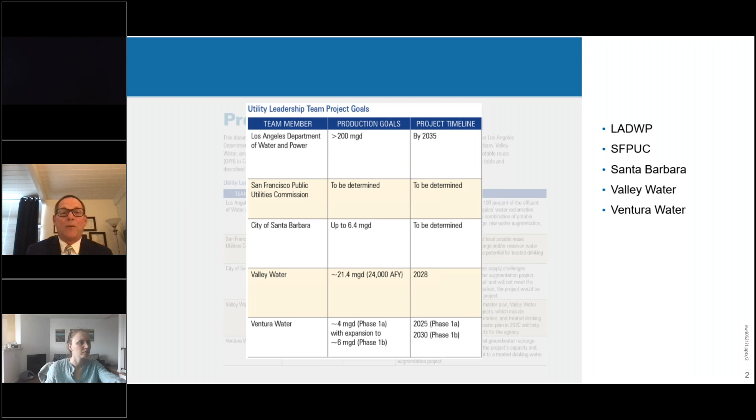So these 5 partners, and Mary, why don't you just go ahead and advance each of those slides. The 5 partners included the Los Angeles Department of Water and Power, the San Francisco Public Utilities Commission, the City of Santa Barbara, the Valley Water District, and Ventura Water. I want to take this moment now to acknowledge their support, this project wouldn't have been possible without their participation and financial support.

So who is our project team? Can you just advance it one more? Good. Oh, I'm sorry, back.

I'm sorry, Matt. Our project team consisted of myself, Suzanne Sharkey, the 4 authors who were Andy Salveson, Adam Olivieri, Charles Bott, and Dan Gerrity, and our utility leadership team made up of representatives from the 5 utilities. Today, we have to speak on their case studies Gina Dorrington from Ventura Water, Manisha Kothari from the San Francisco Public Utilities Commission, Hossein Ashktorab from Valley Water, and Jesus Gonzalez from LADWP. Next slide.

Using this guide. This guide, as I mentioned earlier, is to support elected officials and appointed officials, utility leadership consultants, regulators, and anybody who's really interested in DPR in California.

The guide was intended to provide support to them, yes, on a technical level, but on a policy level as well. The idea was to be used from the early stages of a project's development along the way through permitting and then through implementation and startup of a potable water reuse facility.

The idea was to have this integrated, comprehensive guidance that was more accessible for people who weren't necessarily as well versed in some of the subjects as the technical folks in this area. Next slide.

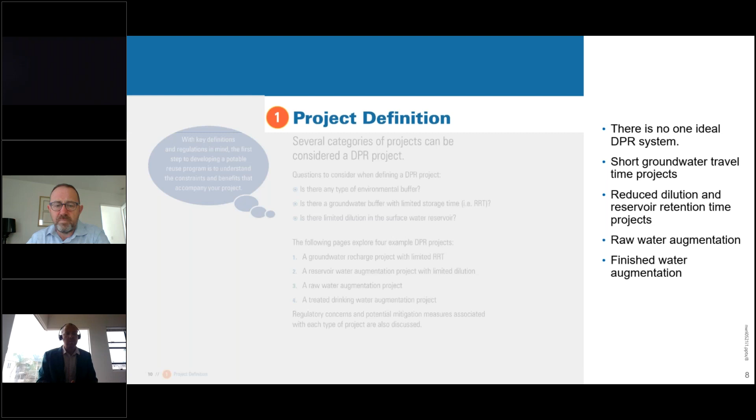And what these projects look like aren't based upon trying to hit any one of those four goals or types of projects. They're based upon the needs of the project themselves, whether a utility has a groundwater basin, albeit small, or a reservoir small, or how is it best to add the purified water into the potable system. So there won't just be four different options in direct potable reuse in California, there'll be much more than that. The graphics in this document try to illustrate some of these.

In this example, we have the community extracting their groundwater, using it, and then reclaiming it and putting it back in the groundwater basin. But the travel time is too fast compared to California regulations. It's less than 2 months. So that's a type of direct potable reuse.

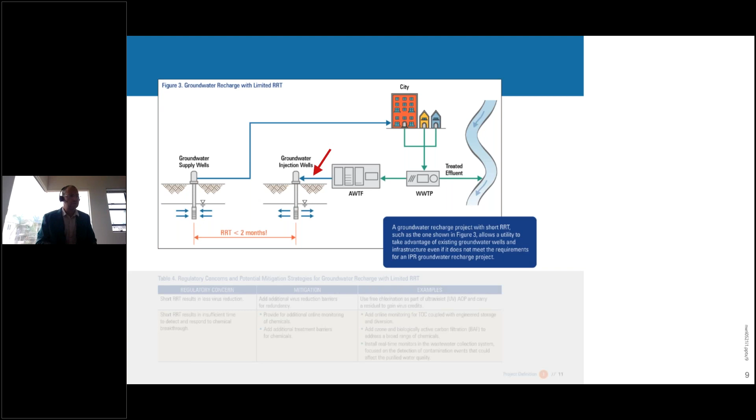Or you may have a reservoir in your community, but it is small. The time in that reservoir or the dilution in that reservoir doesn't meet the indirect potable reuse standards in the state of California. So again, it's just a different type of DPR.

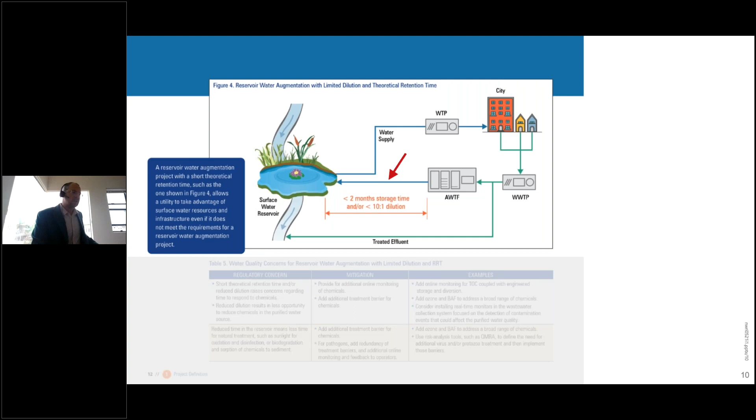And then we have this example where the purified water is sent into the raw water line to a water treatment plant. Through that, you've got blending of the water qualities and how that impacts your water treatment plant. What kind of credits do you get through the system? It gets a little more complex.

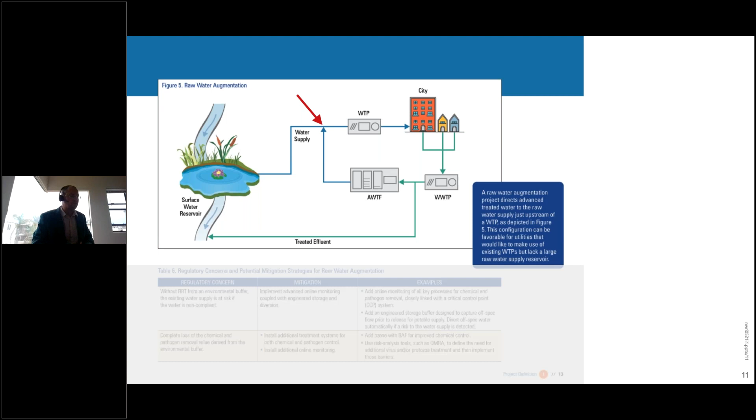And then we have the finished water augmentation or treated drinking water augmentation, where the water is sent downstream of the water treatment plant, blends in with the other finished water supplies, and goes to the community.

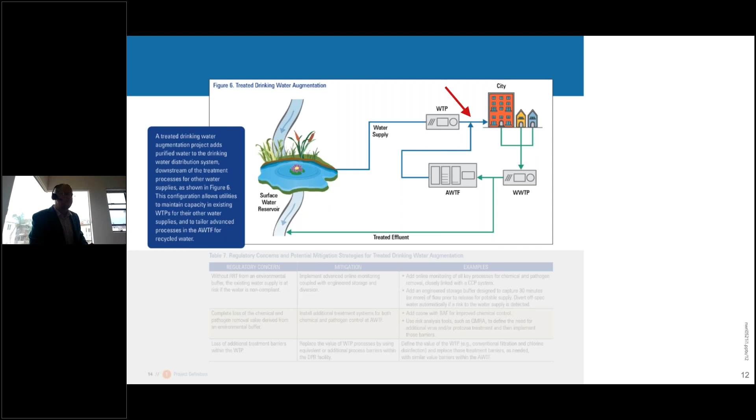So chapter 2 is on technical, managerial, and financial capacity and capability. These projects are challenging and costly. They are absolutely a monumental engineering effort, and those that have succeeded in them should be commended. It requires substantial capabilities as it applies to T, M, and F.

Plus, regulators are looking for not only the aspects of TMF, but a broader potable reuse mindset, where a utility is able to demonstrate its commitment and ability to maintain safe, purified water production for a long period of time.

Within this document, we break down the TMF into technical capabilities, looking at treatment systems, monitoring systems, operator training programs, O&M plans, and the long-term compliance records of the agencies moving forward, whether that's one agency handling both water and wastewater or multiple agencies handling different aspects of water treatment. Financial capabilities are clearly important, not just the ability to build the facility but to maintain it over the long run. Then managerial capability, all about ownership, management, water rights, etc.

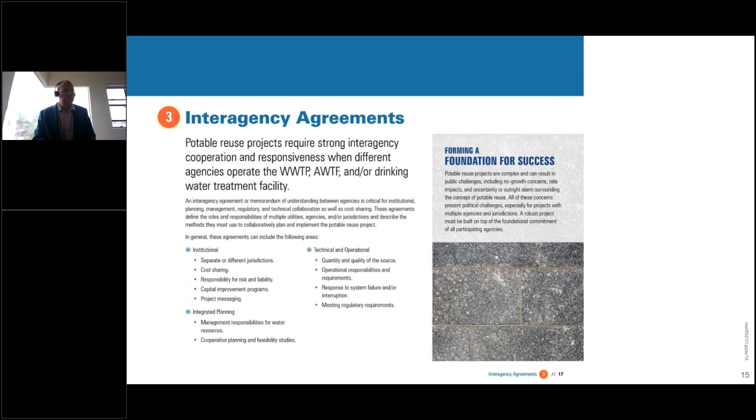Institutional agreements, integrated planning efforts, water quality requirements, and operations. There's a great example out there that everyone points to, and there were reasons why it was so successful -- this is documented -- between the Orange County Water District and the Orange County Sanitation District.

The different things that need to be evaluated in these interagency agreements start with source control -- a primary example of one of many critical issues -- but there's also water rights, the cost of water, and quality. A wastewater treatment plant needs to supply a certain quality of water for the downstream advanced treatment.

How are the projects funded? How are the regulatory questions addressed by multiple agencies? There are grant proposals for project funding, and never to be forgotten, or put last, is the cooperation on public outreach and engagement, where the same goals and messaging about water safety need to apply to all phases of treatment, whether at the wastewater plant, the water plant, or in the distribution system.

Going to that outreach and education, chapter 4 highlights some of the success stories and challenges of outreach and education, as well as helping map how to implement engagement programs.

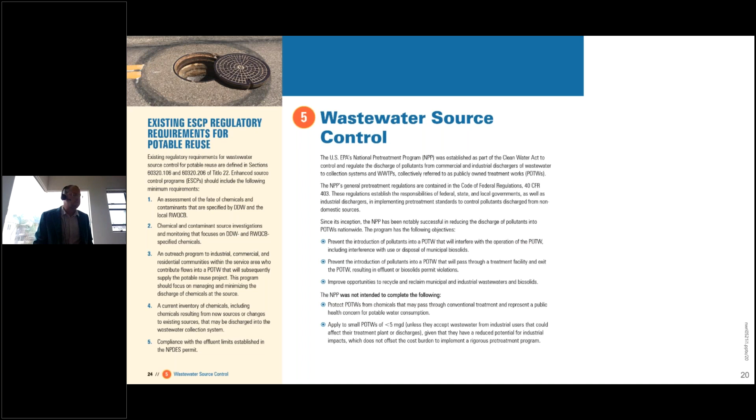Enhanced source control programs are the norm. Those take the national pretreatment program, or the local limits work done by large wastewater plants over 5 MGD, and expand them into this enhanced source control program. Through that, you take a harder look at the chemicals in your collection system discharged by industry, with greater outreach programs, greater sampling programs, and in general a much larger effort.

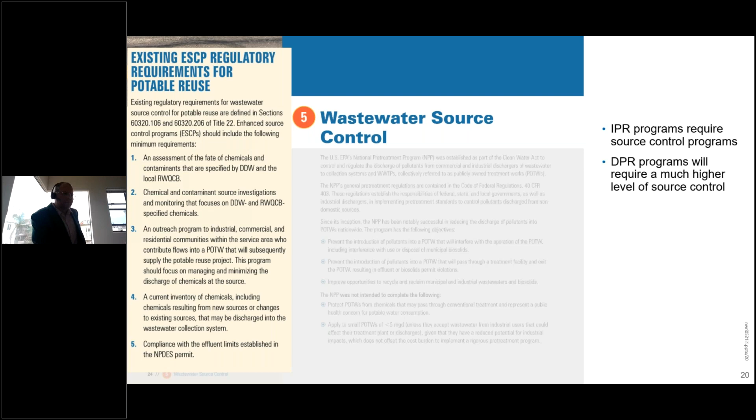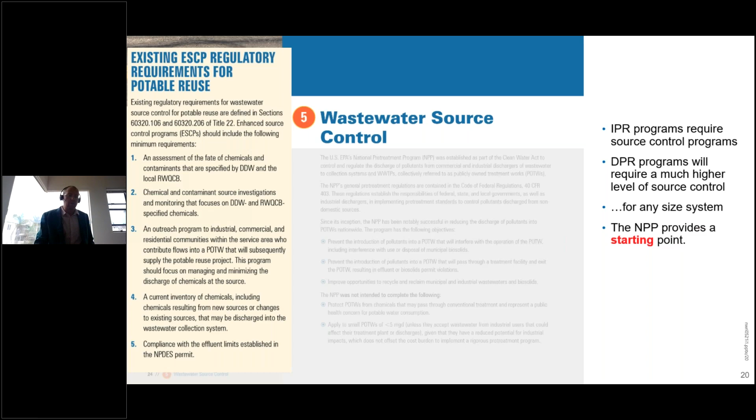But DPR programs will require a much higher level of source control, for any size system, big or small. We have to recognize as a group that the National Pretreatment Program really is just a starting point for these kinds of efforts, and there's a lot to come after that.

One more animation, please. So a primary question is, who comes first, business or water? And the answer is, well, of course, there's a water-first mentality, but business can't be sidelined. It's an important part of our community, and it's really unavoidable in our sewer sheds. So an effective source control program should strive to avoid negatively affecting industries while aggressively engaging them to fully understand the waste streams they discharge and how those streams can be best handled while reliably producing purified recycled water.

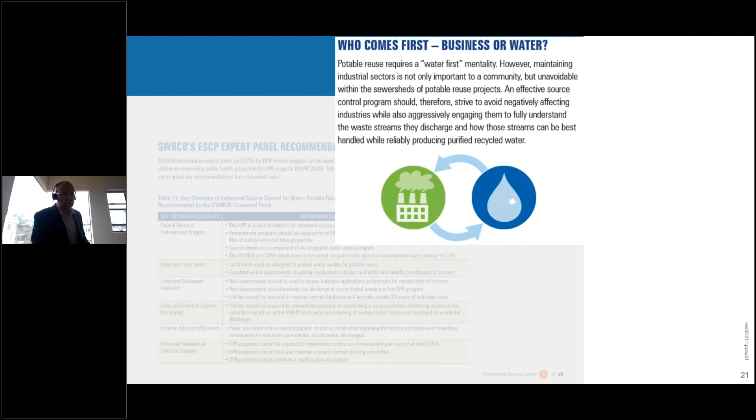Next. One more. So within this document, we do talk about the conventional enhanced source control programs where extensive sampling is done within the wastewater plant, the pure water facility, and into the collection system. And a number of the facilities that do potable reuse, I've seen firsthand them be able to track pollutants from the wastewater plant back to the source in under a day. So there's really good programs out there.

We're now saying what comes next after that. Animation, please. Go ahead, Mary. There we go.

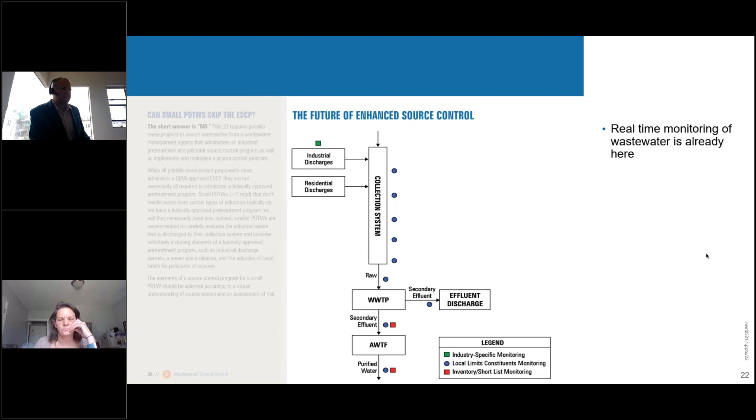So a couple more. Real-time monitoring is already here. And the latest work is examining how to best implement real-time monitoring within the collection system so that we can reduce some of the sampling burden and even more quickly find the source of industrial discharge problems that are posing a potential problem for potable reuse. And with that, I'm going to hand it over to Dan Gerrity.

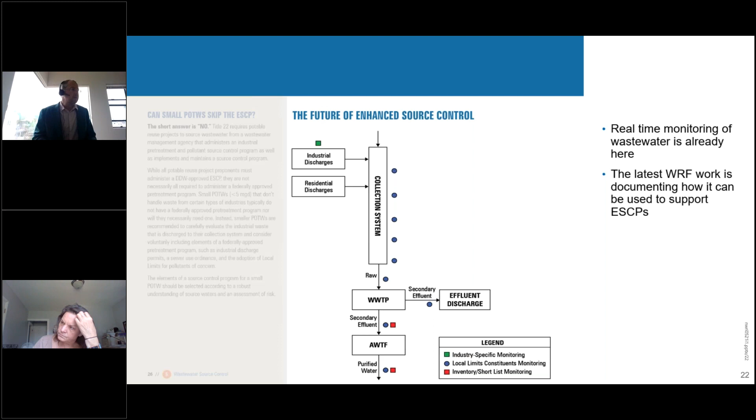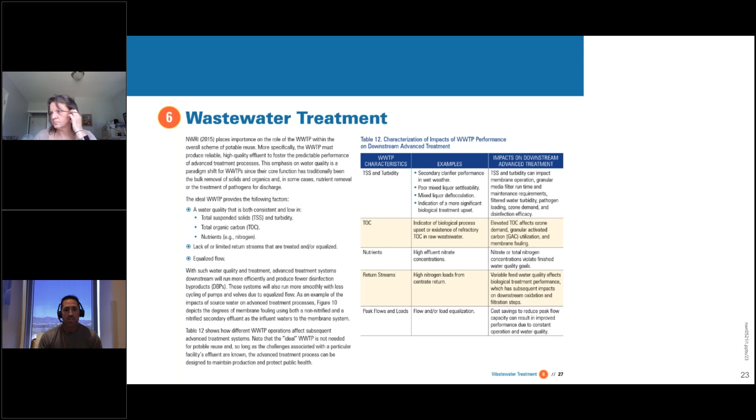All right, thank you, Andy. So one part of potable reuse that's often overlooked is the front end of wastewater treatment. And wastewater treatment in general is important because it sets the foundation for what's happening later on. So next animation, please.

The part that I wanted to focus on is the importance of setting that foundation. So a consistent water quality in terms of a few examples here, total suspended solids and turbidity, total organic carbon and nutrients, that's going to make that advanced treatment train work a lot better. So some particular examples, if you have variable total organic carbon, for example, and you have an ozone process, that's going to create a dosing problem because variable total organic carbon is going to cause that ozone dose to vary over time.

Another example with nutrients would be nitrite. And so if there's variable nitrification or incomplete nitrification, then that's going to impact the level of ozone dosing that's needed in that type of system.

Another example that relates to what I've done in the past in terms of research is looking at the importance of biological treatment on trace organics. And so often full nitrification is important for getting reductions in a wide variety of trace organics, which reduces the load on the advanced treatment train later on.

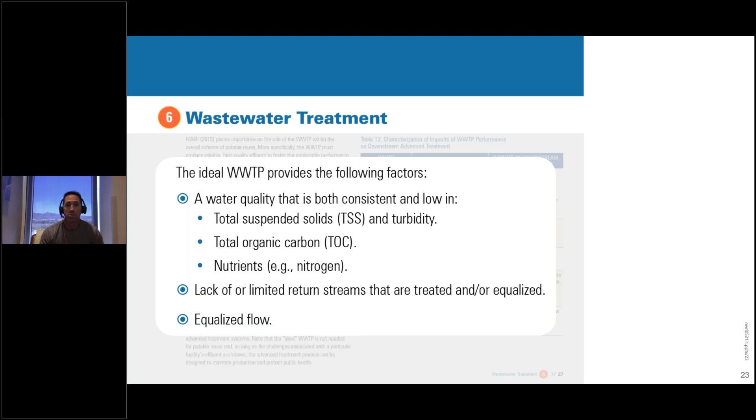Another issue has been return streams. And so return streams have been identified as a potential source of NDMA precursors, for example. So by limiting those return streams, it's going to possibly solve problems that might pop up later on. Next slide, please.

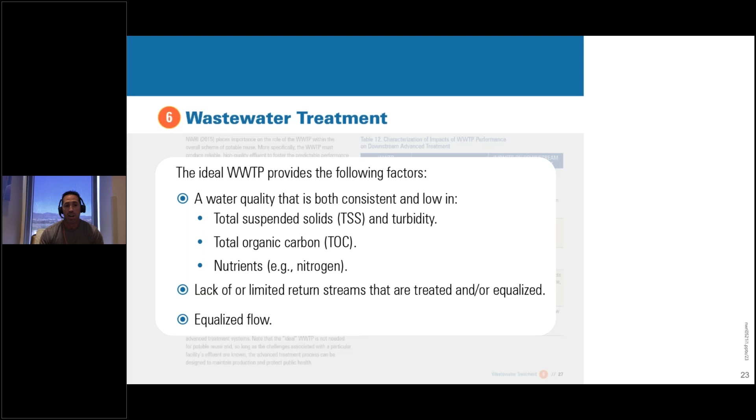And so a project that Carollo is actually leading right now is looking at this very question. So how does upstream wastewater treatment impact downstream advanced water treatment? So in terms of ozone performance, membrane performance, there's a lot of implications for whether it's just BOD removal or if you're getting full nitrification, there's going to be implications further downstream.

Another thing that I wanted to point out is where the water is pulled from in order to feed an advanced treatment train. And that's something that came up in a project that was led by Trussell Technologies in the past, where they were looking at parallel pilot scale treatment trains, one ozone biofiltration based and one membrane based. The feed water, there was the potential to take secondary effluent or tertiary effluent. And so the tertiary effluent might be more consistent, might be slightly better quality, but that tertiary effluent was chloraminated, which would lead to NDMA formation going into the front end of the advanced water treatment train.

So these are the types of issues that need to be balanced when you're piecing together the overall treatment train for a potable reuse system. Okay, next slide.

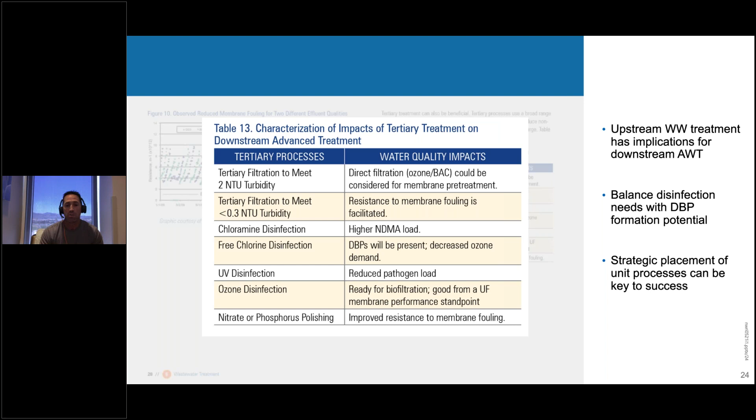And so that brings us to the multiple treatment barrier, multi-barrier approach. And so the part that I really wanted to highlight here is this concept of the 4 R's: reliability through redundancy, robustness, and resiliency.

And then in terms of resiliency, we want that treatment train or treatment process to be able to handle those short-term upsets that might happen. So how resilient is that system to an operational upset?

When you look at the draft DPR regulations, or even the existing groundwater reuse or surface water augmentation regulations, a lot of these concepts are built in. I'm providing a few examples from the draft DPR regulations. By requiring more than 4 processes per pathogen, or more than 3 treatment mechanisms per target, that's building redundancy into the system to make sure we don't have a failure that might have an implication for public health.

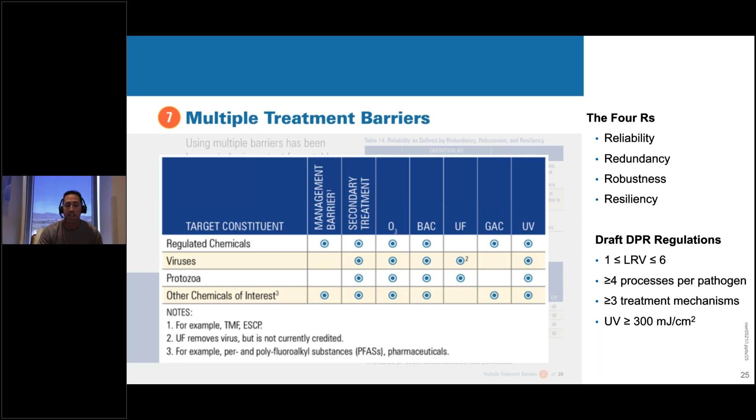What I wanted to point out, and we'll talk about this a bit later, is that there's a series of research projects ongoing or recently completed that deal with a lot of the remaining questions related to direct potable reuse.

One is this DPR1 project where we developed a quantitative microbial risk assessment tool. It's really user-friendly, gives people the opportunity to run a number of scenarios very quickly to answer questions like: what magnitude, duration, and frequency of failure can be tolerated before a risk benchmark is exceeded?

I'm providing an example there. And so that gives us an idea of what level of redundancy we need to make sure we're adequately protecting public health in a potable reuse system.

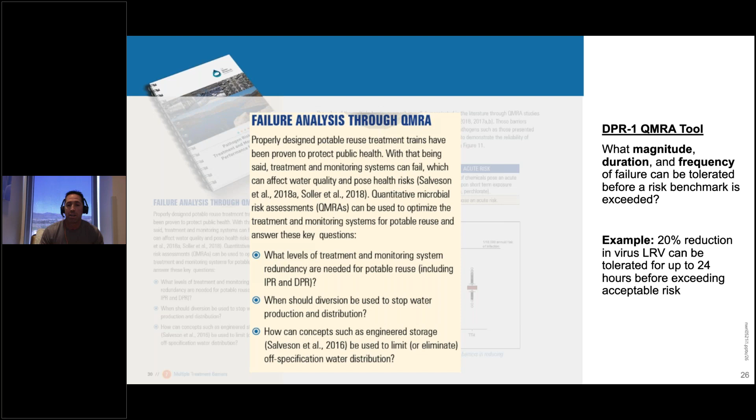Which brings us to pathogen control and monitoring. Particularly with potable reuse, where we have these really high quality drinking waters on the back end, this brings up somewhat of a problem because we're unable to detect any type of pathogens at these very, very low levels.

Instead, what we have to do is take this risk assessment approach, and look at what's going into a treatment plant versus what's coming out at the tail end that we're trying to target in terms of protecting public health. That difference gives us an idea of what level of treatment we need in between to make sure we're hitting that target on the tail end.

I mentioned that DPR1 project, which is the QMRA tool. There's also a DPR2 project that's improving characterization of raw sewage pathogen concentrations. By better characterizing what's coming in on the front end of a treatment plant, and what levels or targets we're trying to reach to ensure we're protecting public health, that's going to give us the LRV target that we need to achieve.

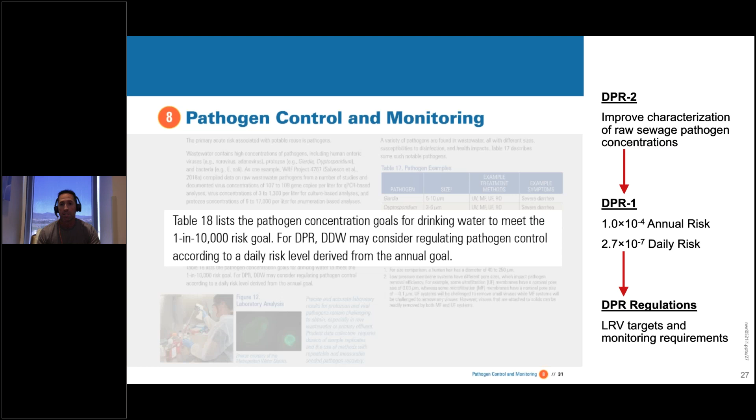Often these regulatory LRVs are conservative, again to ensure adequate public health protection. But there is potential, and this is highlighted throughout the document, to seek higher credits for a particular process, as long as those credits can be demonstrated and also verified with a reliable surrogate monitoring framework. I'll talk about that a little bit later.

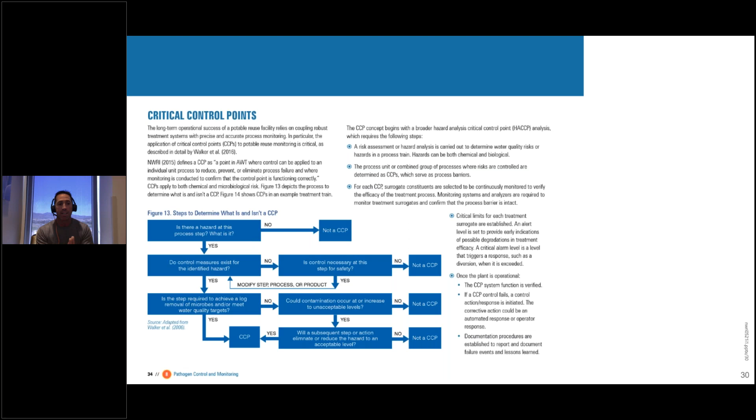Like I mentioned earlier, ensuring that these processes are working correctly and getting these regulatory credits, these LRV credits, one of the ways of doing that is identifying these critical control points.

Identifying a critical control point is important for both chemical and microbial hazards. These critical control points are often going to be linked to, in the easiest sense, looking at microbes. If you're trying to get an LRV credit for a certain pathogen, it's often going to be demonstrated at a critical control point.

At each of these critical control points where we want to demonstrate an LRV, there's often going to be a surrogate associated with that. Identifying an appropriate surrogate for verifying process performance through monitoring is going to be an important component of achieving that LRV credit.

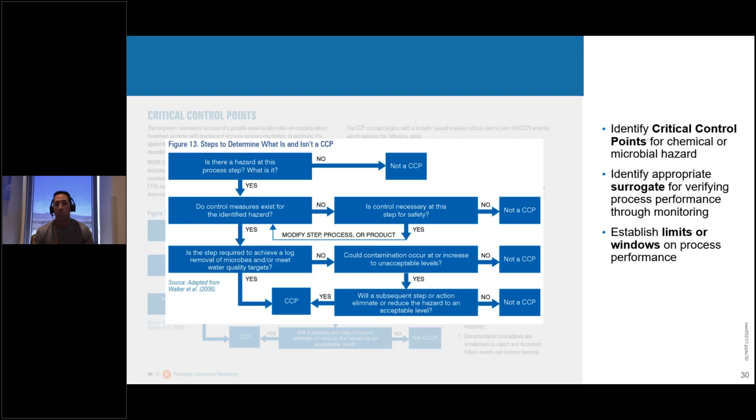Once we have that critical control point and the surrogate, we can establish limits or windows on the performance of that process and that surrogate. Once we possibly go outside that window, that's indicating there's some type of failure associated with that process. One of the important things is to have a plan on how to address it if that failure occurs.

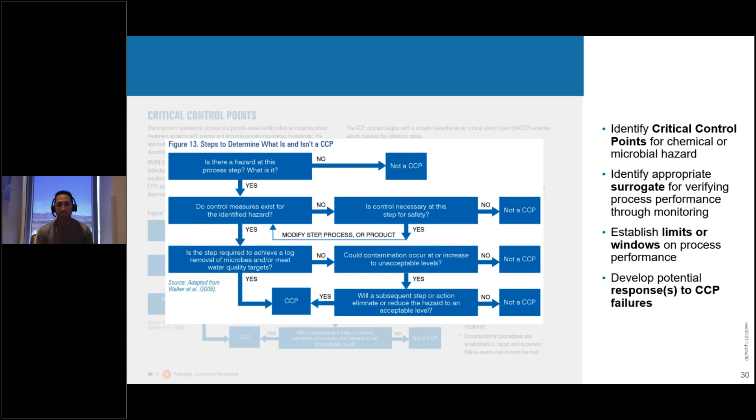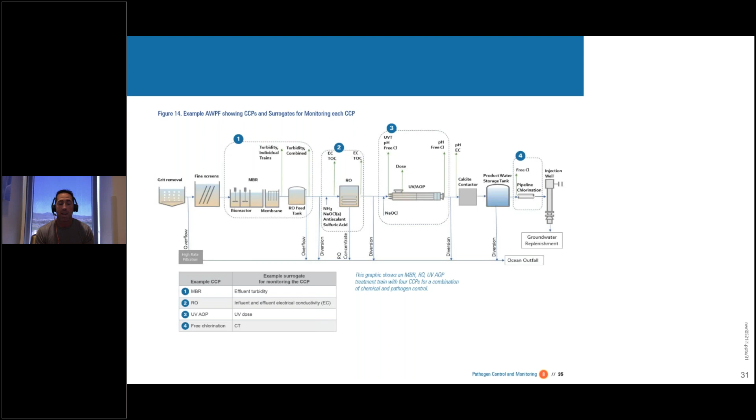This is showing a potential treatment train for a potable reuse system. The numbers there at the top represent potential critical control points. And then for each of those critical control points at the bottom, there's a potential surrogate that we can use to make sure that process is operating the way that it's intended.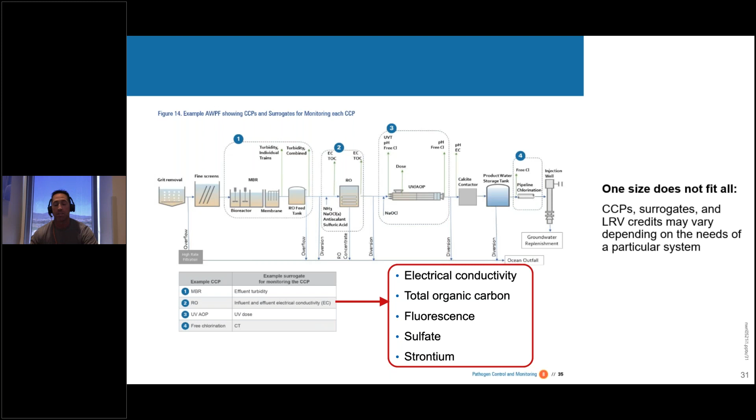The last one that I'm going to talk about is chemical control and monitoring. This is very similar to what we have with the microbial side, just different groups of targets that we're looking at.

With chemicals, when you look at, and I'll talk about trace organics here, trace organic compounds are present in wastewater, obviously. One thing that we've learned over time is that the typical concentrations of the vast majority of trace organic compounds, even in a secondary effluent, are going to be below some public health benchmark or even maximum contaminant levels. But that doesn't necessarily mean that that's good enough, and there's a number of reasons for that. One reason being that there are unknowns out there.

By having this robust multi-barrier treatment, we're able to potentially address those unknowns because we have a high level of treatment targeting things that we already know about. The other thing that comes up is public perception. In general, people do not necessarily want to have trace organic compounds in the water they're drinking. So whether or not it poses a public health risk, there's going to be the public perception question that also needs to be addressed with the potable reuse treatment train.

Throughout this document, there are examples of compounds that many of you are already familiar with, for example nitrosamines and sucralose. What are the public health benchmarks associated with those? What are the treatment performance benchmarks associated with those? This document will highlight some of those more common compounds that'll become a frequently discussed target of a potable reuse treatment scheme.

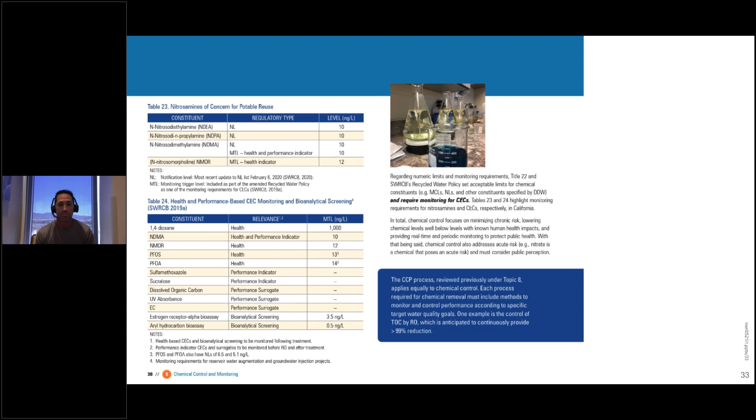A well-designed potable reuse system is not only going to address the chronic exposures, but also acute risks. Depending on the compound, some are going to be more chronic in nature. For example, NDMA with a cancer endpoint is going to be more chronic, but there are compounds, like nitrate, that pose an acute risk. A potable reuse treatment train should address both the chronic and acute risks associated with chemicals.

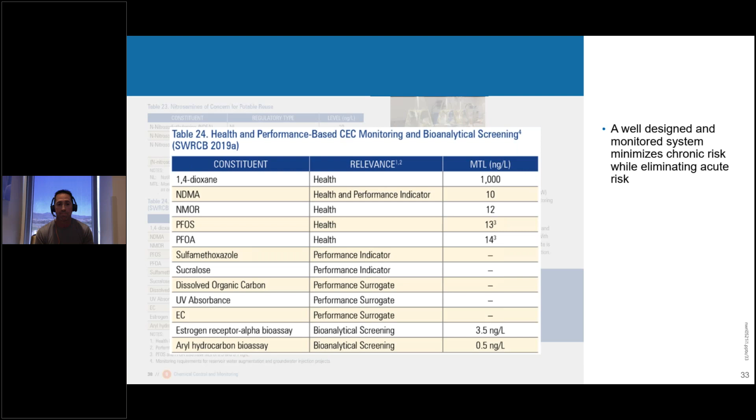The last thing I'll talk about is the importance not only of RO-based treatment in California, but outside of California, there are opportunities for potable reuse systems to rely on ozone biofiltration. Carollo Engineers was a leader on the ozone biofiltration front in demonstrating that it provides a robust alternative to membrane-based treatment for things like contaminants of emerging concern and trace organic compounds.

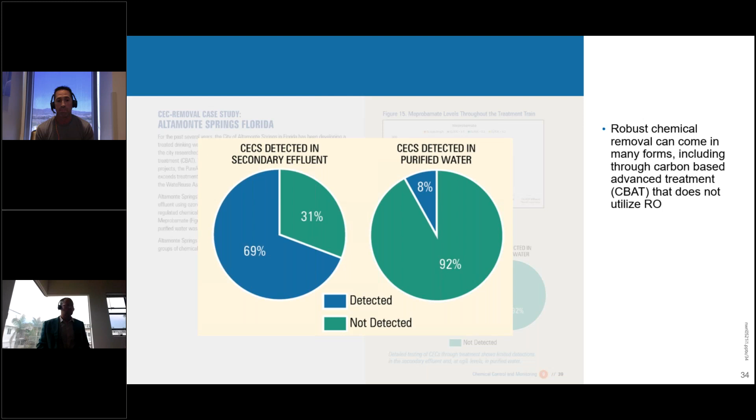So if you followed all these processes and you've enacted your program and you've got a pure water facility being constructed or ready to go, you still need operators. We face a challenge in this industry with sufficient operators for our water and wastewater plants. As we move to more potable water reuse, we need these advanced water treatment operators. There's a lot of growth in the potable water reuse industry, so these operators are going to be at a premium.

Training materials on the different types of advanced treatment were developed by the Water Research Foundation, led by Troy Walker, a project that I participated in with him and his team. And then the test exams were actually developed. Grades 3 through 5 AWTO exams have been completed, and these are now being administered. As a matter of fact, last time I checked, there were 3 AWTO 5 certified folks now, but there's a lot more grade 3 and some grade 4. So there's a lot of movement, but there's need for more.

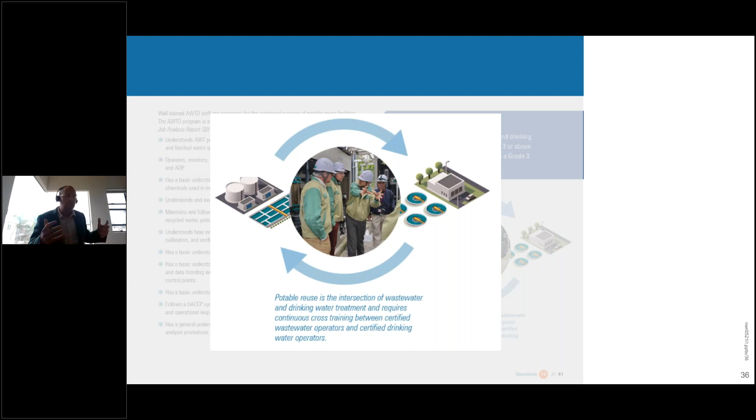Stepping back a bit, it's important from the operator standpoint to understand that potable reuse is the intersection of wastewater and drinking water treatment. Both those mindsets are valuable, but they need to overlap. The wastewater operator is critical to understanding the impacts of wastewater effluent on downstream advanced treatment, and the water operator needs to understand the goals of public health protection. Bringing them together is the AWTO.

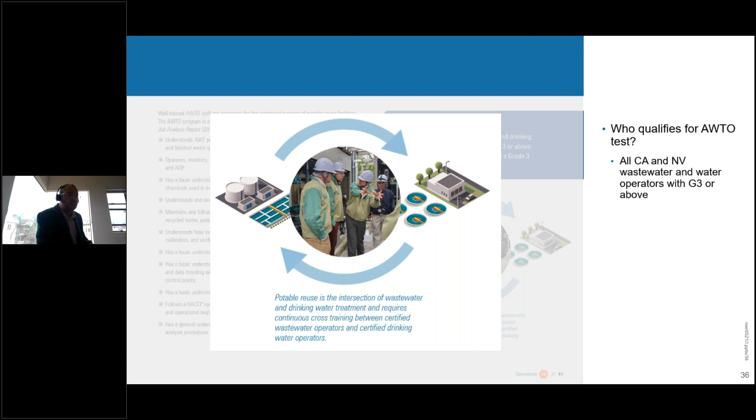So who qualifies for the AWTO test? All you have to do is have a California or Nevada wastewater or water operator certification in the grade 3 or higher range. You can then take the similar grade 3, 4, or 5 - you've got to start at grade 3 and move your way up - AWTO exam and get your approvals.

So now you've made the water, you've operated the facility, but you've got water quality management. You see we're kind of following the drop of water through the system in this guide.

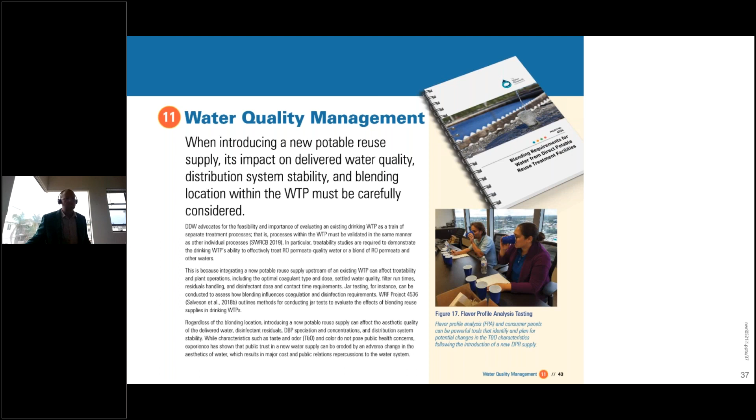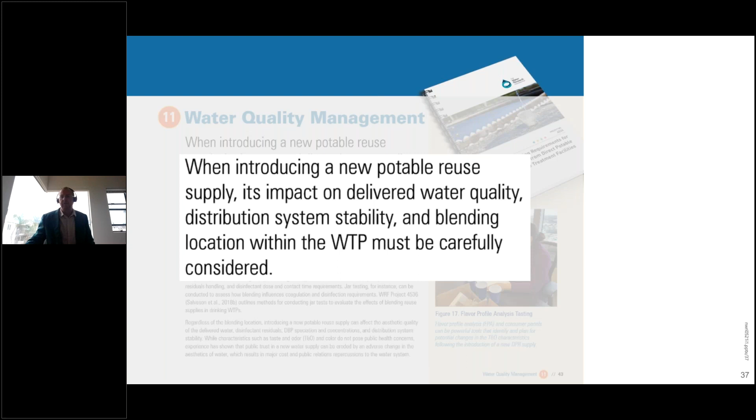When you're introducing a new potable reuse supply, you've got to take a close look at the impact on delivered water quality, distribution system stability, and blending location - whether it's ahead of the wastewater plant, ahead of the water treatment plant, within the water treatment plant, or in the finished water.

The guide follows some of the industry's best practices and walks us through 5 steps to understanding and implementing a stabilization process, starting with data review, working through desktop evaluations and stabilization alternatives. Then we recommend coupon testing and pipe loop testing, actually demonstrating the stabilization in a distribution system. That leads to implementation of the optimal solution.

On emerging issues, this industry's done a great job staying out in front of most challenges, but we do need to recognize that things come up and sometimes we need to adjust. Early in my career, there was the rise of NDMA in the late 90s, and the development of UV photolysis, whether medium pressure or low pressure, which was well addressed through treatment.

Then came 1,4-dioxane. We saw the development of advanced oxidation for UV AOP processes in particular, which also provided a broader barrier for chemical pollutants that could be in RO permeate. We also saw the rise of concern about hormones, pharmaceuticals, and personal care products. What we found through the research was that we're really good at removing those, and that they're a broader public perception challenge than they are a public health challenge.

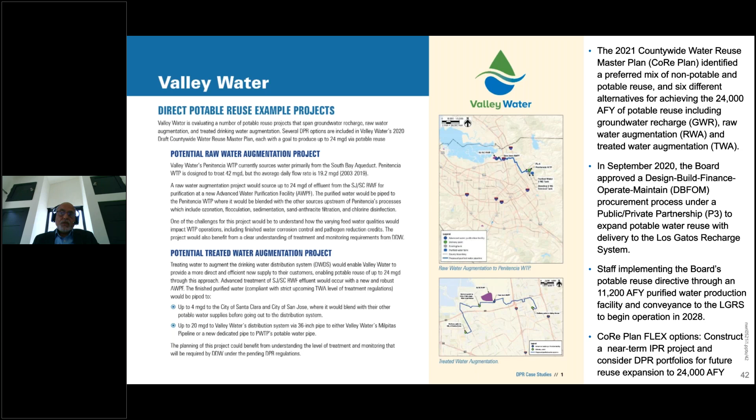So this project is going to be exciting for us not only because of the groundwater recharge, but also because in the future, based on the core plan, it's going to be expanded up to 24,000 acre-feet. So around 11,000 acre-feet per year is coming from groundwater recharge, and the future additional capacity up to 24,000, which we call flexible under the core plan, is going to be covered by raw water augmentation and/or treated water augmentation.

So it's going to be a lot of challenges here, but based on the core plan that we have, it's been very important to look at all the options we have and see which one is going to help us move from 11,000 to 24,000 acre-feet per year, which this recent regulation activity and the amendment is going to help us see better looking into the future for DPR. At this time, I'd like to stop here and give it back to you, Kevin. Thank you.

Thanks, Hossein. And you can begin to see, everyone, the diversity of the sorts of challenges that utilities face in these DPR projects—just the planning and integration of ideas among the various agencies involved in these kinds of projects.

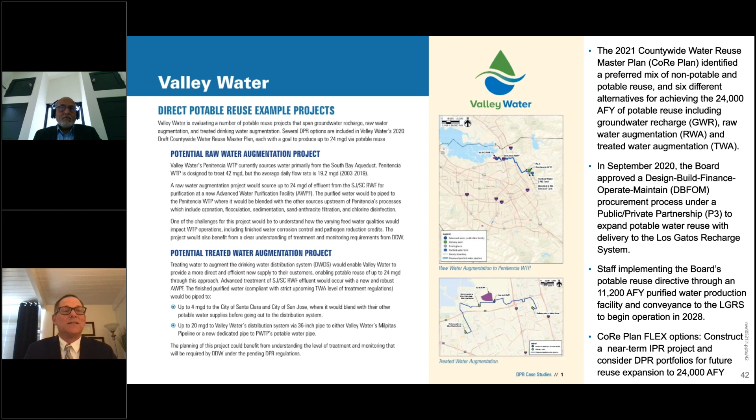Let's advance the slide, and let's also look at a different kind of challenge that SFPUC faces. For that, we'll bring on Manisha Kothari. Manisha, take it away.

Thanks, Kevin. Hi everyone, good afternoon. My name is Manisha Kothari, and I'm with the San Francisco Public Utilities Commission. I manage our alternative water supply program, which includes potable reuse. San Francisco PUC serves about 2.7 million customers across 4 counties here in Northern California. A number of our customers are wholesale customers outside San Francisco—27 wholesale customers—and we also serve the city and county of San Francisco, which is our retail customer. So I'm going to focus this discussion on our case study, which is really focused on San Francisco and some of the unique challenges we have in the city.

In San Francisco, there's no real potential for indirect potable reuse. We don't have any kind of environmental buffer, and we don't have a water treatment plant within the city limits. Our water comes into San Francisco through our regional water system outside the city, so it basically gets treated before it gets into the city limits. So IPR is out for San Francisco.

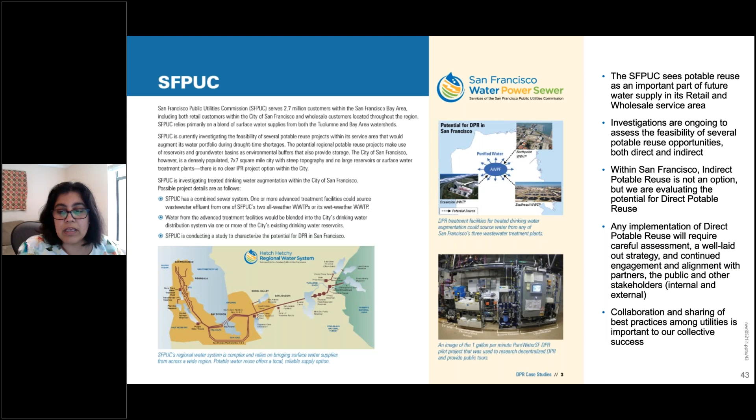I think that was a very successful research project, and it's leading to the next step now—exploring the potential for treated water augmentation in San Francisco by looking at the different facilities, resources, reservoirs, plumbing in place, and distribution networks, and how we can develop a project to look at the maximum potential for potable reuse through treated water augmentation in San Francisco. It's a step-by-step process. We're very pleased to be part of developing this guide and looking at the DPR framework that's coming out now, and we're very excited about the collaborative effort. Thank you very much—I'll turn it back to Kevin.

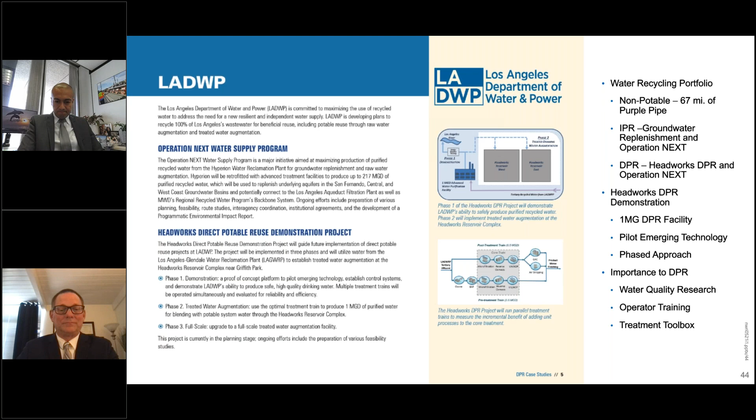I appreciate that, Manisha. Thank you. And let's advance the slide.